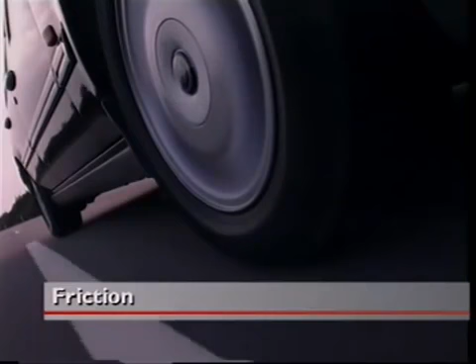Friction is a force that resists the movement of one surface over another. It can be desirable, but often is not. It is caused by surface rough spots that lock together. These spots can be microscopically small, which is why even surfaces that seem to be smooth can experience friction. Friction can be reduced, but never eliminated.

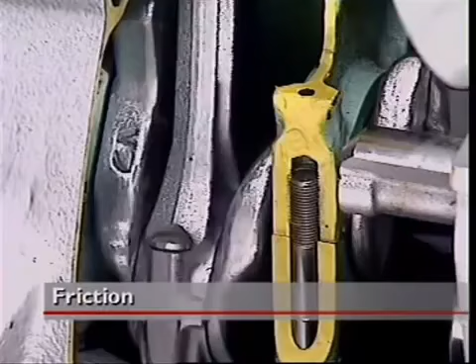Friction is always measured for pairs of surfaces, using what is called a coefficient of friction. A low coefficient of friction for a pair of surfaces means they can move easily over each other. A high coefficient of friction means they cannot move easily over each other.

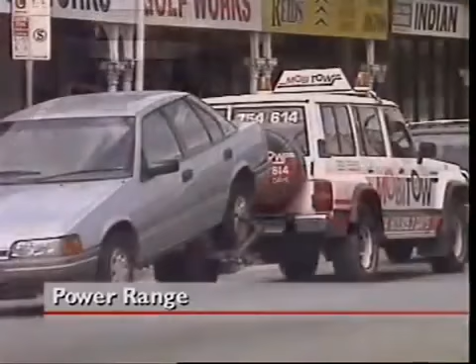An engine that is quite powerful may not be designed to produce its maximum power over long periods. A petrol engine in a car may give good acceleration in short bursts, but it can overheat or fail if it's operated at maximum speed and power for too long.

A heavy-duty diesel engine in a large truck is designed to operate near or at its maximum speed and load for long periods without damage. Many diesels will suffer if they are run on light loads or at low speeds for too long.

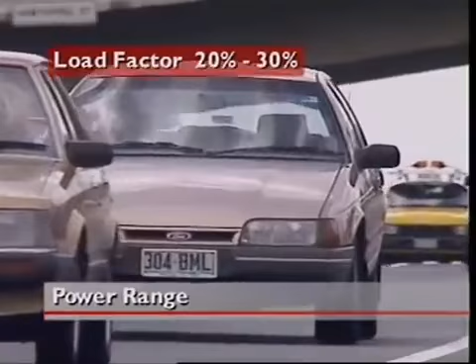One way to describe the power range of an engine is to give its load and speed as an average over a certain period. This is stated as a percentage and is called load factor. An engine required to operate at maximum power over 10 hours is said to have a load factor of 100%. Using that as a standard, most car engines would operate at only about 20 to 30%.

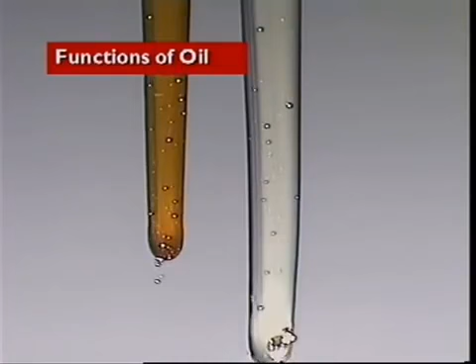One function of a lubrication system is to reduce friction. Friction occurs between all surfaces in contact. When moving surfaces come together, friction tends to slow them down. Sometimes that's just what's wanted. Friction can be useful, but it can also cause serious damage.

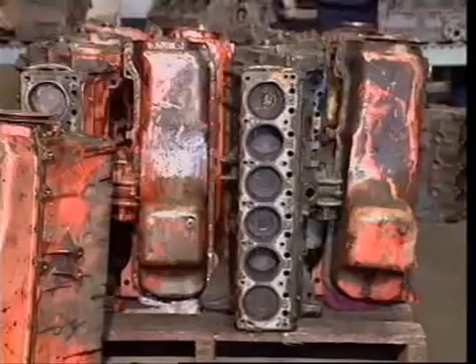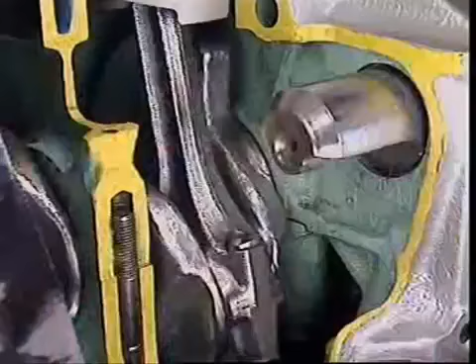It can make metal parts so hot they melt and fuse together. When that happens, an engine is said to have seized. How long an engine lasts depends to a large extent on how well it's lubricated, especially at the points of extreme loading.

So lubrication reduces unwanted friction and controls it where it is useful. It reduces wear on moving parts. Clearances fill with oil so that engine parts move or float on layers of oil instead of directly on each other. Much less power is needed to move them, and that's a plus.

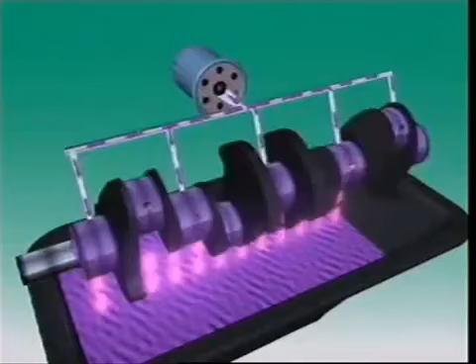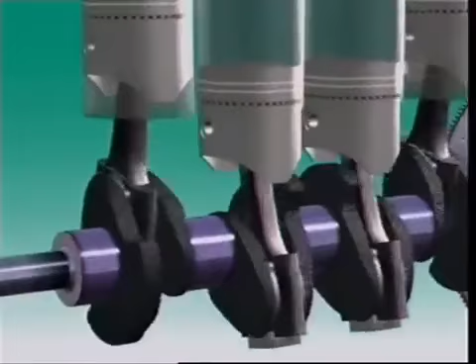It helps cool an engine. It collects heat from the engine, then returns to the sump where it cools. It helps absorb shock loads. A power stroke can suddenly put as much as 2 tons force on main bearings. Layers of oil cushion this loading.

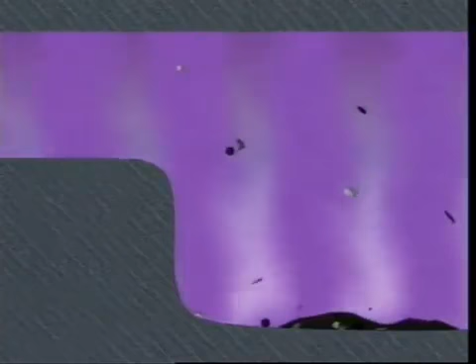Oil is also a cleaning agent. It collects particles of metal and carbon and carries them back to the sump. Larger pieces fall to the bottom.

For oil to do all of the work that's expected of it, it must have special properties. Its viscosity is crucial. Viscosity is a measure of how easily a liquid flows. Low viscosity liquid is thin and flows easily. High viscosity liquid is thick and flows slowly.

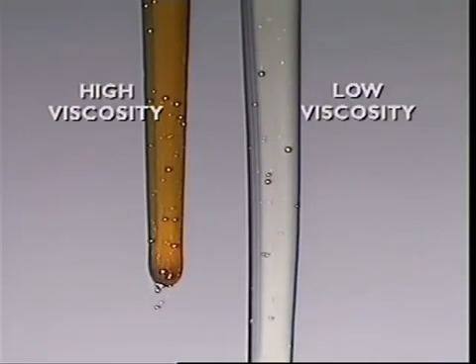Lubricating oil must be thin enough to circulate easily between moving parts, but not so thin that it will be forced out from between them. If it is forced out, parts will be left in direct contact and they'll be damaged. If it's too viscous, it moves too slowly to protect parts, especially in a cold engine.

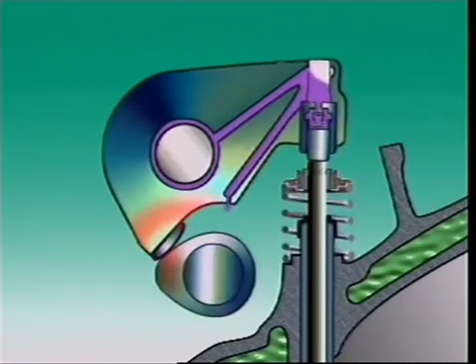It was once normal practice for engines to need one grade of oil for summer and another for winter. Oils are graded or classified by the Society of Automotive Engineers, or SAE. An engine oil with an SAE number of 50 has a higher viscosity, or is thicker, than an SAE 20 oil.

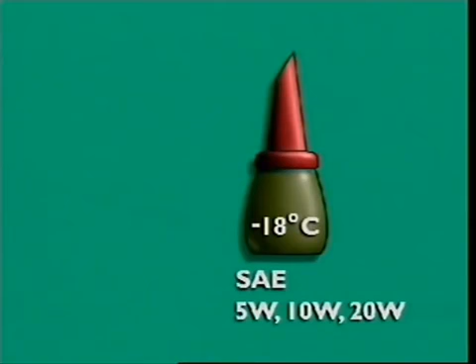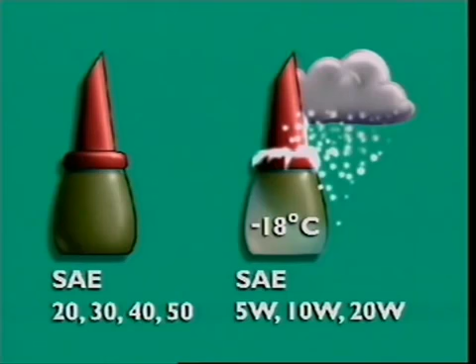Oils with low viscosity ratings, say SAE 5W, 10W and 20W, were tested at a low temperature, around -18 degrees Celsius, and were used for cold conditions. Oils with high viscosity ratings, say SAE 20, 30, 40 and 50, were tested at a high temperature, around 99 degrees Celsius, and were used for hotter conditions.

Modern oils, however, are blends of oils which combine these properties. The oils are blended with additives called viscosity index improvers to form multigrade or multi-viscosity oils. They provide better lubrication over a wider range of climatic conditions than monograde oils.

Oil is also classified by the American Petroleum Institute, or API, service classification. Oils for spark ignition engines carry a prefix S, and diesel or compression ignition engines use C. Some oils have additives that make them suitable for both. Manufacturers recommend which viscosity and API classification is ideal for a particular engine.

Special chemicals called additives are added to the base oil by the oil companies. Different combinations of these additives allow the oil to do different jobs in an engine.

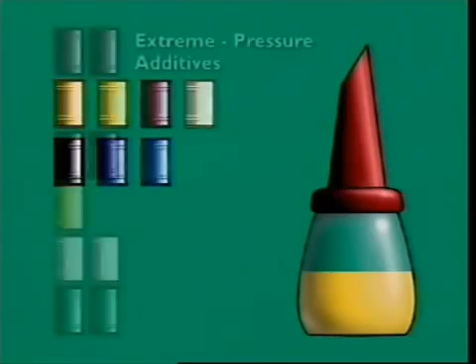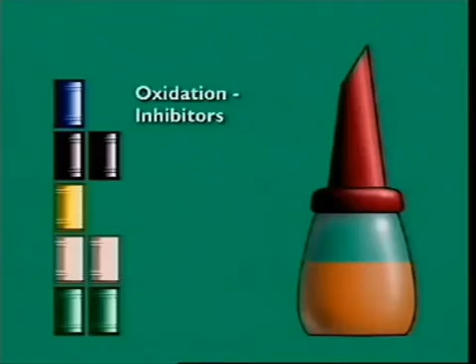Extreme pressure additives coat parts with a protective layer so that the oil resists being forced out under heavy load. Oxidation inhibitors stop very hot oil combining with oxygen in air to produce a sticky material like tar that clogs galleries.

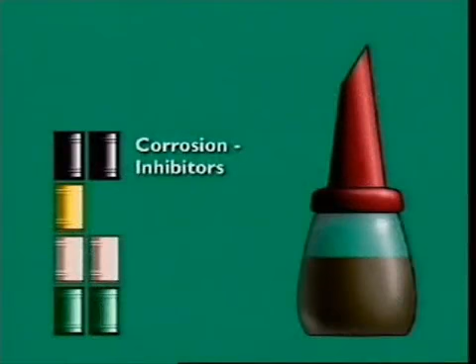Corrosion inhibitors help stop acids forming that cause corrosion, especially of bearing surfaces. Anti-foaming agents reduce the effect of oil churning in the crankcase and minimize foaming.

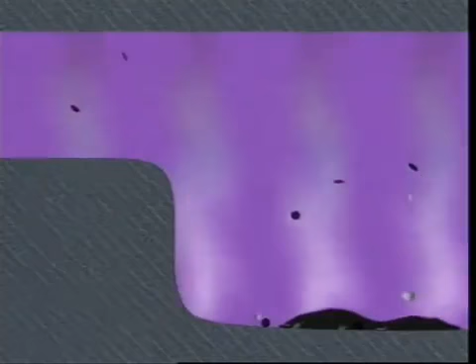Detergents reduce carbon deposits on parts like piston rings and valves. Dispersants collect particles that can block the system, separate them from each other and keep them moving. Then they will be removed when the oil is changed.

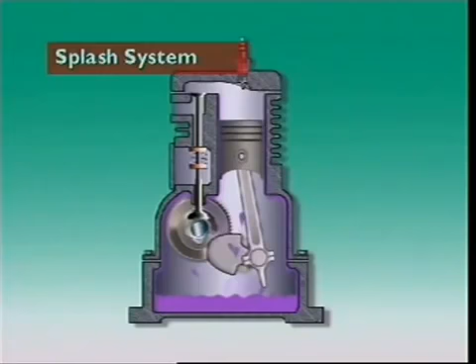Most small four-stroke petrol engines use what is called splash lubrication. On horizontal crankshaft engines, a dipper on the bottom of the connecting rod scoops up oil from the crankcase for the bearings. In this engine, it is also able to splash oil up to the valve mechanism.

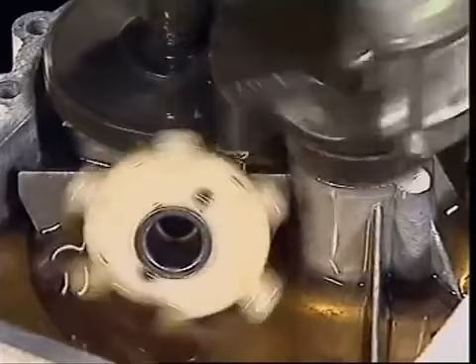Alternatively, an oil slinger can be driven by the camshaft. A similar system is used in most small vertical crankshaft engines. Oil is also splashed up to the valve mechanism.

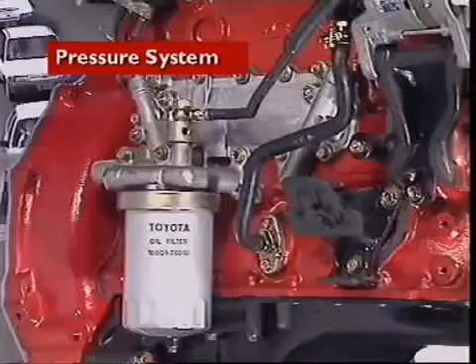Modern vehicle engines use a pressure or force feed lubrication system where the oil is forced around the engine under pressure. Let's look at petrol engines first. Oil won't flow up into the engine by itself, so a pump collects it through a pickup tube and a strainer and forces it through an oil filter, then into passageways in the engine block called galleries.

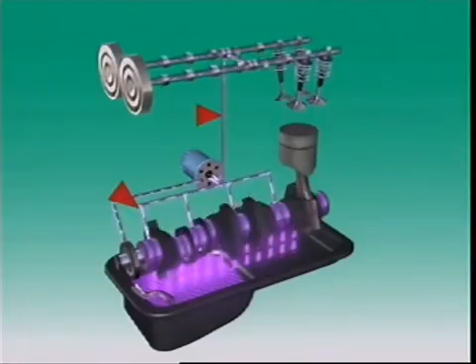The galleries allow oil to be fed to the camshaft bearings, the valve mechanism and the crankshaft main bearings. Holes drilled in the crankshaft webs allow the main bearings to supply oil to the big end bearings. After circulating through the engine, the oil falls back to the sump to cool.

This is called a wet sump lubrication system because the oil is kept in the sump ready for the next time it's used.

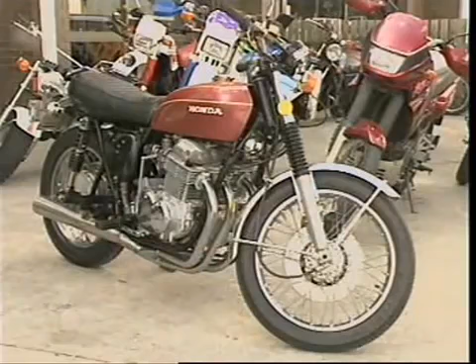Some special engines use a dry sump lubrication system. It uses all of the parts that make up a wet sump system and it lubricates the engine in the same way.

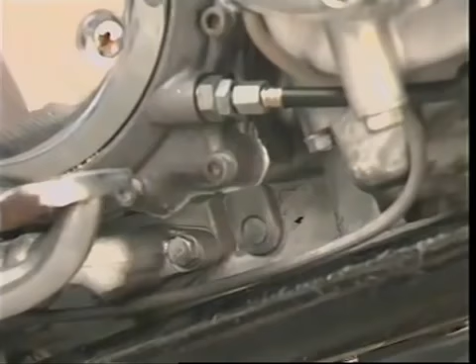It differs from the wet sump system in the way the oil circulates. In a dry sump system, the oil falls to the bottom of the engine into an oil collection pan. A scavenge pump then pumps it to an oil tank where it is stored until the normal oil pump collects it and pumps it through the filter and engine in the normal way.

Because there is no oil storage sump under the engine, it can be mounted much lower than in a wet sump system. The oil tank can be positioned away from the engine where it can get best cooling, and the amount of oil in the system can be much greater than in a wet sump system.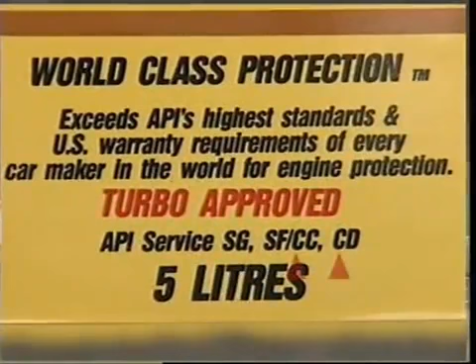It's common for some diesel engines to use an oil cooler to cool the oil in the engine. The cooler and oil filter are usually on the same mounting on the cylinder block.

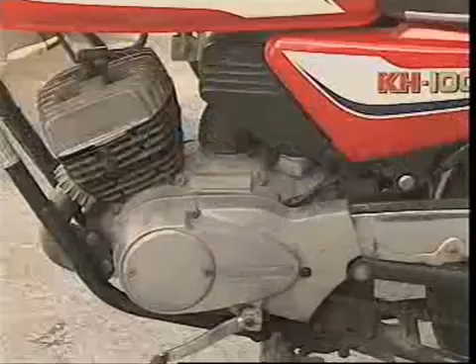Some two-stroke petrol engines use an oil injection system. This system doesn't need the oil and petrol mixed manually. An engine-driven oil pump takes oil from a tank and pumps a measured amount directly into the engine, where it will mix with the fuel and lubricate the internal engine parts.

The pump delivers the correct amount of oil for the engine speed and the throttle setting, which makes it a more precise system than running the engine on a fixed oil-petrol mixture.

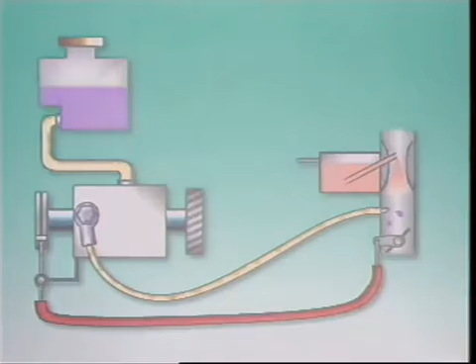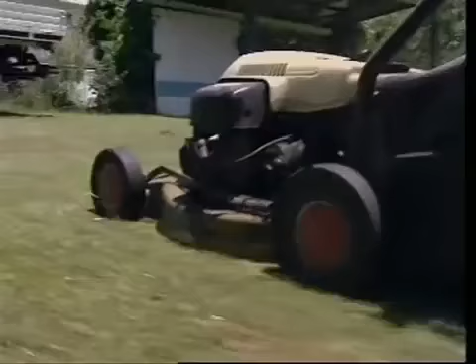Most two-stroke petrol engines use a set petrol oil mixture for lubrication. There are different kinds of oils and petrol oil mixtures. They must be used according to the manufacturer's specifications.

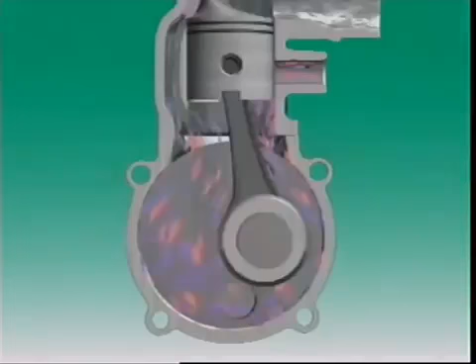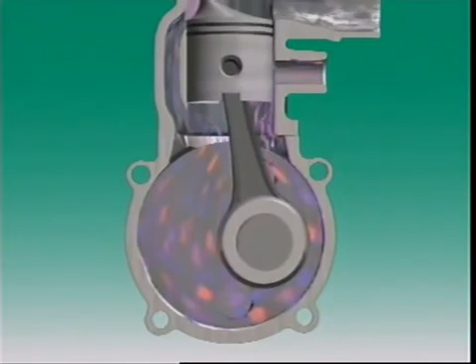For small two-stroke engines, the oil and fuel are pre-mixed. A mixture of air, oil and fuel passes through a sealed crankcase on its way to the combustion chamber. That makes the crankcase part of the fuel intake system, so it can't be used as a sump.

As the air, fuel and oil enter the crankcase, the fuel evaporates, leaving behind enough oil to keep parts coated and lubricated.

The crankshaft and connecting rod bearings in two-stroke engines are ball and roller types. Because the parts of this kind of bearing only roll over each other, they only need a minimum of lubrication.

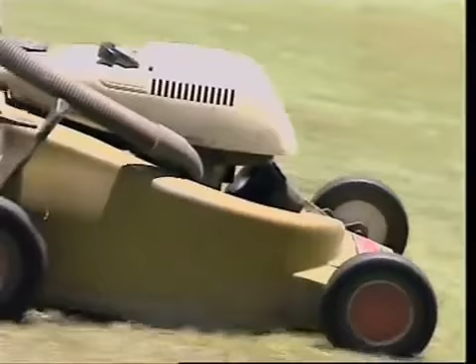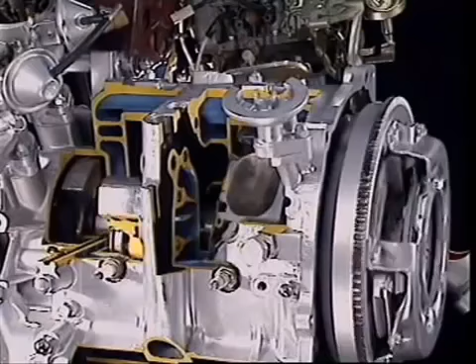Let's look at the rotary engine lubrication system. Its main lubrication system is similar to that of a four-stroke petrol engine.

An oil pump picks up oil from the oil pan through a strainer and delivers it to an oil cooler on the front of the engine. The oil cools, then enters the oil filter at the rear of the engine.

A regulator valve controls the oil pressure in the system. The oil goes onto the main bearings and rotor bearings and is sprayed into rotor cavities. Along the way, it absorbs heat, then returns to the oil pan.

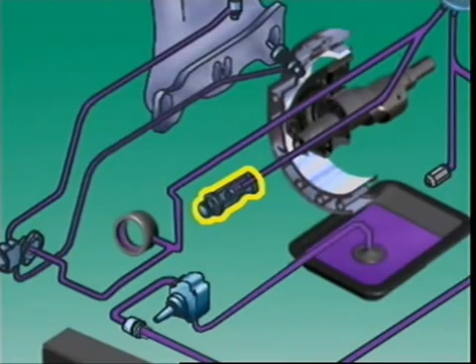A bypass valve at the end of the eccentric shaft helps the engine warm up. When the engine is cold, it stays open and sends oil from the shaft to the oil pan and stops it spraying on the rotors.

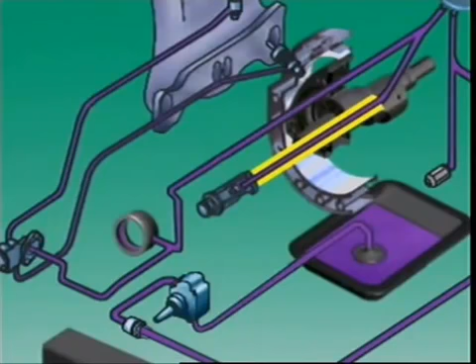As the engine heats, the valve starts to close. Pressure in the shaft builds up and cooling oil starts to spray on the rotors.

The rotary engine uses oil injection. A pump sends oil to oil nozzles in the intake manifold and to oil nozzles in the intake passages in the rotor housings. Oil from these nozzles goes to the engine and lubricates the rotor seals. If the engine has a turbocharger, oil lubricates it as well.

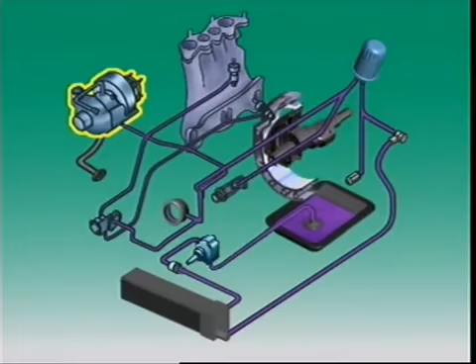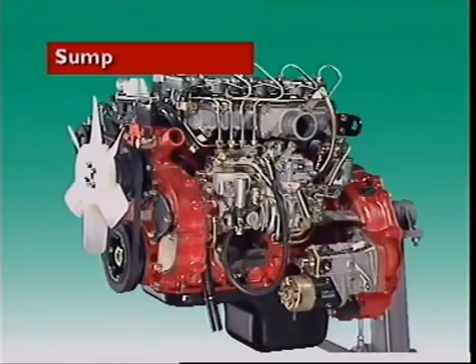This section examines the sump. The sump is bolted to the engine under the crankcase. It is a reservoir or storage container for the engine lubricating oil and a collector for oil returning from the engine lubricating system. The sump can be formed as a thin sheet metal pressing and shaped to ensure that oil will return to its deepest section.

The oil pickup tube and strainer are located in this deep section to ensure they stay submerged in oil and to prevent air being drawn into the oil pump.

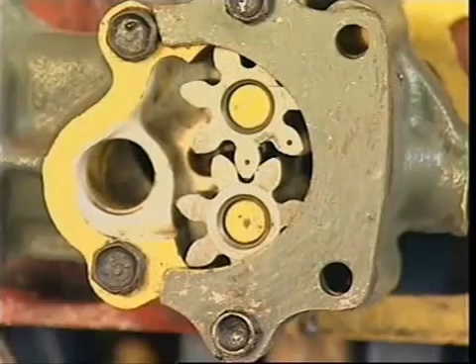Some high-performance vehicles have a windage tray fitted to prevent churning of the oil by the rotation of the crankshaft. Baffles prevent oil from surging away from the pickup during cornering, braking and accelerating.

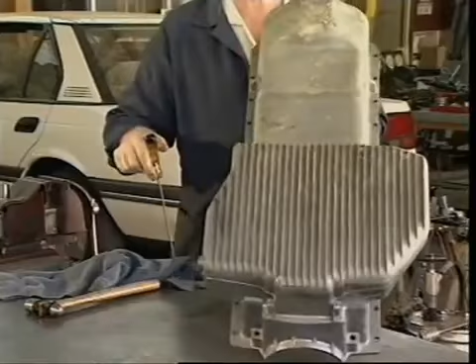The sump's large external surface area helps heat transfer from the oil to the outside air. In some designs, the sump is an aluminium alloy casting with fins and ribs to assist in this heat transfer.

The oil collection pan is part of the dry sump system which is used in some motorcycles. It replaces the sump in the wet sump system, but it is much smaller.

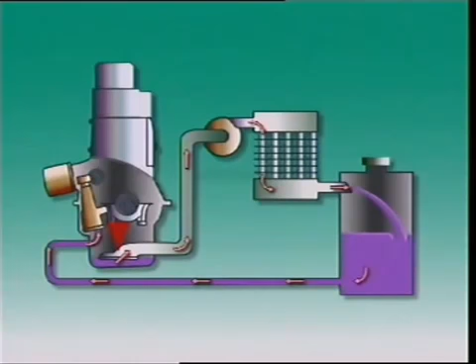It collects the oil after it is circulated through the engine and directs it to the pickup strainer on the scavenge pump. Since no oil is stored in the engine in this system, a dipstick that is normally used to check oil levels in the sump is not needed.

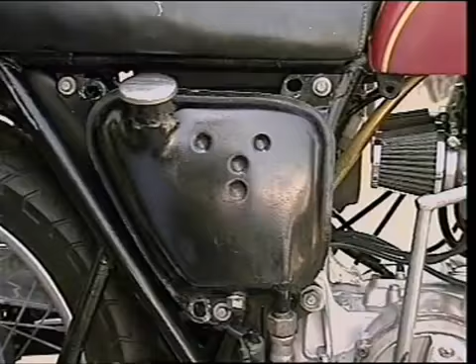The oil tank is part of the dry sump lubrication system. It is usually positioned away from the heat of the engine, and the large surface area improves cooling. It receives oil from the scavenge pump and allows it to settle and cool.

The main oil pump then pumps it back through the lubrication system. A dipstick is often provided to measure the oil level.

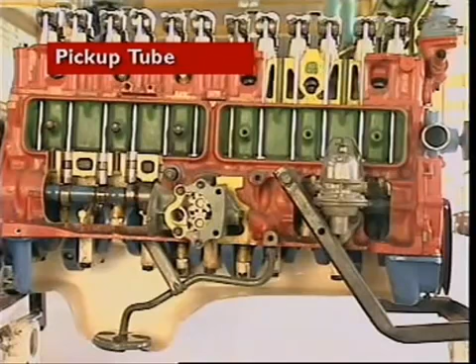Between the sump and the oil pump is a pickup tube with a flat cup and a strainer immersed in the oil. The strainer stops large particles of dirt and carbon entering the pump and damaging it. The pickup tube leads to the inlet of the oil pump on the low pressure side of the pump.

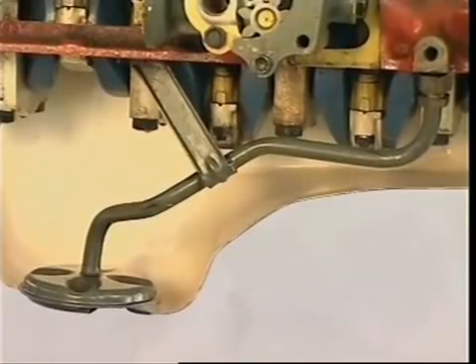Oil pumps may be driven from the camshaft or the crankshaft.

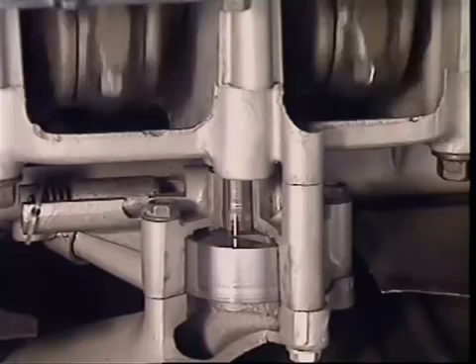In a rotor-type oil pump, an inner rotor drives an outer one. As they turn, the volume between them increases. This larger volume lowers the pressure at the pump inlet.

Outside atmospheric pressure is then higher. This forces oil into the pump, and it fills the spaces between the rotor lobes. As the lobes of the inner rotor move into the spaces in the outer rotor, oil is squeezed out through the outlet.

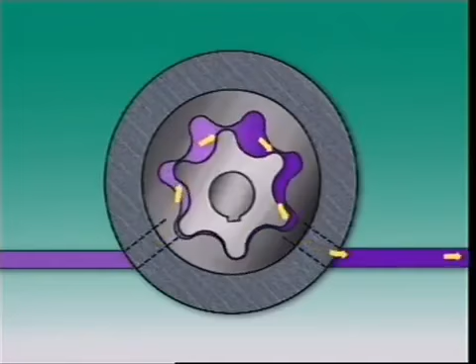The crescent pump uses a similar principle. It is mounted on the front of the cylinder block. The inner gear is on the end of the crankshaft, which then drives the pump directly.

An internal toothed gear meshes with this inner one. Some gear teeth are meshed, but others are separated by the crescent-shaped part of the pump housing. The increasing volume between gear teeth causes pressure to fall.

Oil is then taken through the intake port and carried around between the gears and crescent, then discharged to the outlet port.

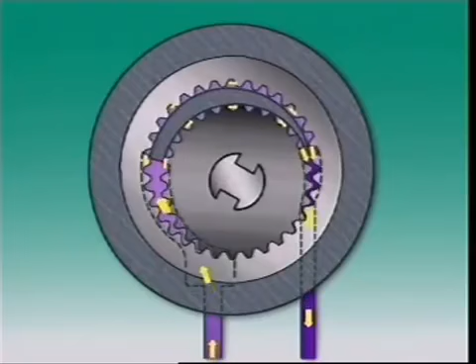In a geared oil pump, the driving gear meshes with a second gear. As both gears turn, their teeth separate, creating a low pressure area. Higher atmospheric pressure outside forces oil up into the inlet. The spaces between the teeth fill with oil. The gears rotate and carry oil around the chamber. The teeth mesh again, and oil is forced from the outlet toward the oil filter.

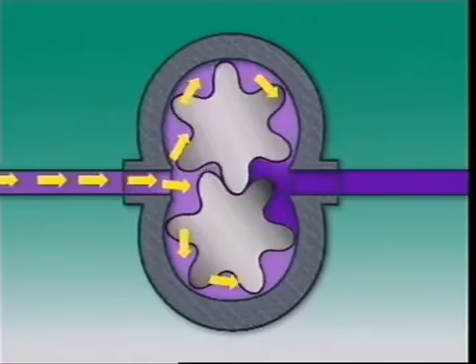A normal pump is capable of delivering more oil than an engine needs. It's a safety measure to ensure the engine is never starved for oil. As the pump rotates and engine speed increases, the volume of oil delivered also increases. The fixed clearances between the moving parts of the engine prevent oil escaping back to the sump, and pressure builds up in the system. An oil pressure relief valve stops excess pressure developing. It's like a controlled leak, releasing just enough oil back to the sump to regulate the pressure of the whole system.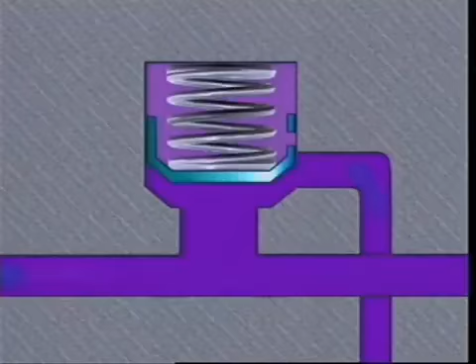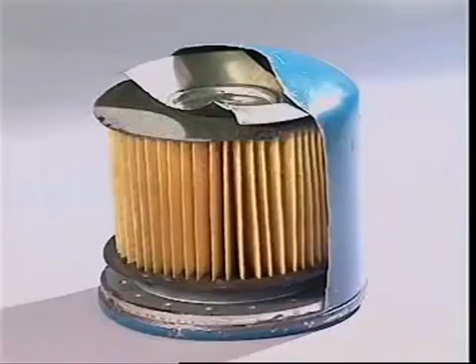This section examines oil filters. There are two basic oil filtering systems: full flow and bypass. The full flow type filters all of the oil before delivering it to the engine. The bypass type only filters some of the oil. The full flow type is the more common. Its filter uses pleated filtering paper in a metal housing to collect harmful particles.

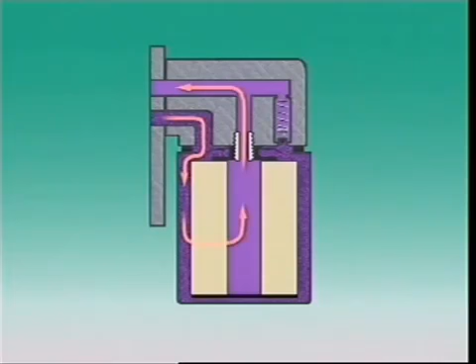Normally, all oil goes through the filter before it gets to the engine, but if the filter clogs up, it can starve an engine of oil. As a safety measure, full flow filters have a bypass valve. If the filter clogs, this valve opens and directs unfiltered oil to the engine. Dirty oil is better than none at all.

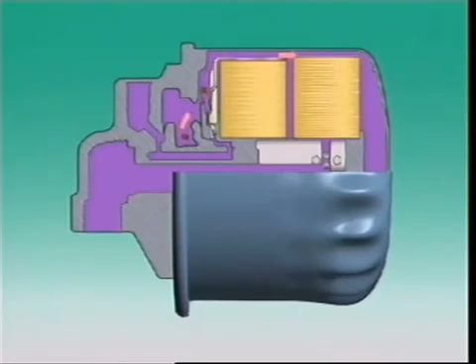Most oil filters on diesel engines are larger than those on similar petrol engines, and some diesel engines have two oil filters. Diesel engines produce more carbon particles than petrol engines, so the oil filter can have a full flow element to trap larger impurities and a bypass element to collect sludge and carbon soot.

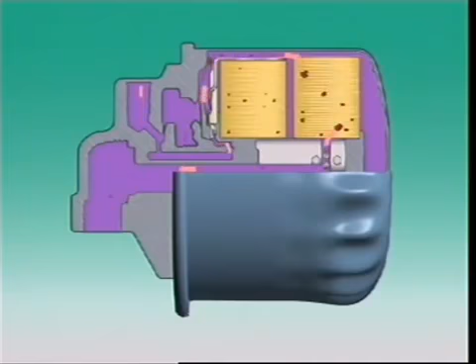In a bypass system, the bypass element filters only some of the oil from the pump by tapping an oil line into an oil passage. It collects finer particles than a full flow filter. After this oil is filtered, it goes back to the sump.

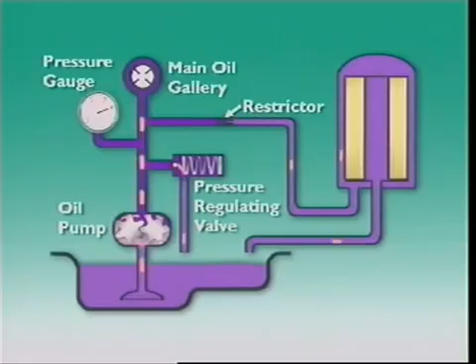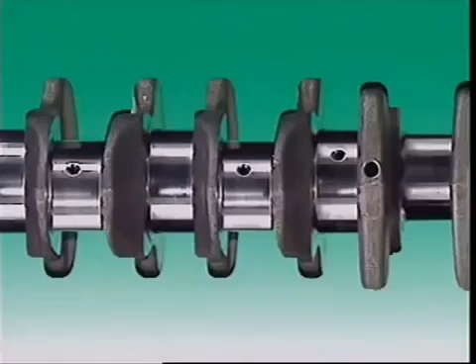Pistons, rings and pins are lubricated by oil thrown onto the cylinder walls from the connecting rod bearings. Some connecting rods have oil spurt holes. These holes are positioned to receive oil from similar holes in the crankshaft. Oil can then spurt out at the point in the engine cycle when the largest area of cylinder wall is exposed. It lubricates the walls and gudgeon pin, and also cools the underside of the piston.

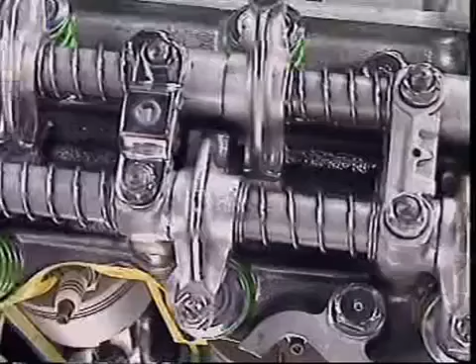Oil feeds to the cylinder head and through a gallery to the camshaft bearings and valve train. As well as lubricating these moving parts, it also gathers heat from the engine, so its temperature keeps rising. Finally, it drains back to the sump to cool and start again.

If a lubrication system fails, it's serious, so it's crucial to know it's working. If oil pressure falls too low, a pressure sensor in a gallery can light up a warning light or register on a gauge. Low oil pressure can mean a lack of oil. It may have leaked away, or it may have been burned. This can be caused by worn piston rings which let oil into the combustion chamber. Some engines even use an automatic cutout that turns off the engine if oil pressure falls too low.

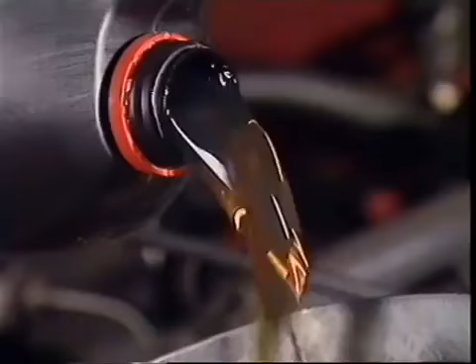Too little oil in the engine is a problem, but so is too much. The crankshaft can whip it into foam and cause leaks by flooding the seals. Of course, the simplest indicator of oil level is still the dipstick.

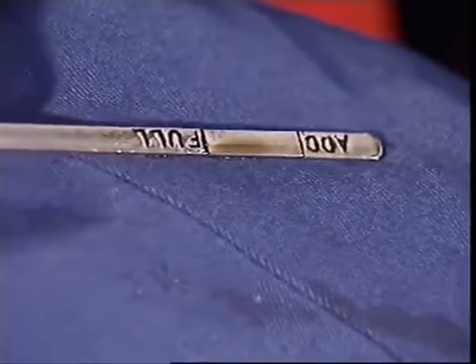Engines which operate under severe conditions may use an oil cooler to cool the oil in the engine. In diesel engines, the oil cooler and oil filter are often on the same mounting on the cylinder block. The oil cooler is a heat exchanger. It transfers heat from the oil to coolant from the cooling system.

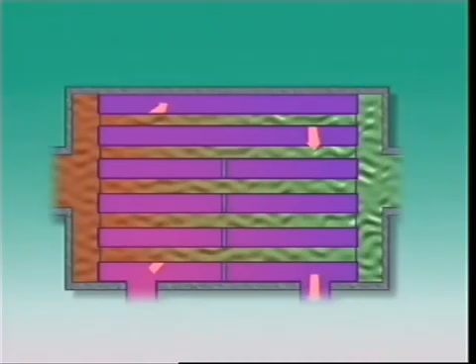Coolant circulates through tubes in the cooler, and oil fed from the lubrication system surrounds the tubes. As the coolant circulates, heat is removed from the oil. In another design, the oil cooler is mounted in the airstream at the front of the vehicle. This type of oil cooler uses the flow of air passing across its fins to cool the oil circulating through it. It is called an oil-to-air heat exchanger.